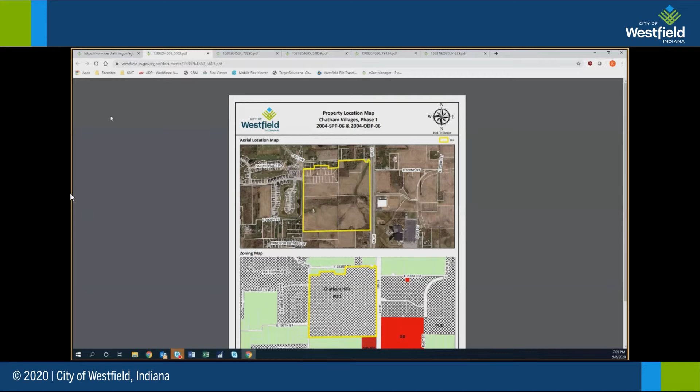Good evening, Commissioners. For the record, I am Corey Harris of the Community Development Department. The item before you is the proposed Chatham Villages Phase 1 Primary Plat and Overall Development Plan, located west of US 31, east of Tomlinson Road, north of 196th Street, and south of 203rd Street. The proposed plans are for 207 single-family residential lots and one block on approximately 147 acres in the Chatham Hills PUD district. This item is scheduled for its public hearing tonight. It has been properly noticed and advertised, and staff has received 3 public comments. Phil Sundling and Brad Henke of Henke Development Group are here to present, and I am available for questions from staff. Thank you.

Good evening, members of the Plan Commission. Phil Sundling here alongside Brad Henke with Henke Development. Pam, if you don't mind, could you pull up the presentation for tonight? Yeah Phil, this is Kevin, it should be up on the screen at this point. Okay, yep, we see it now. Okay, as you can see, if you scroll to the second page, Kevin, if you would.

Kevin, are you able to scroll to the second page, the site plan? Yeah, it sounds like there's going to be a little bit of a delay here. So, yeah, it's there. Are you? I see it now, yep.

As you can see here in the site plan, the main entry of this Chatham Village aligns with the existing main entry into existing Chatham Hills. Just to get you oriented here, on the north side is 203rd Street, on the west side is Tomlinson Road, and on the east there's US 31.

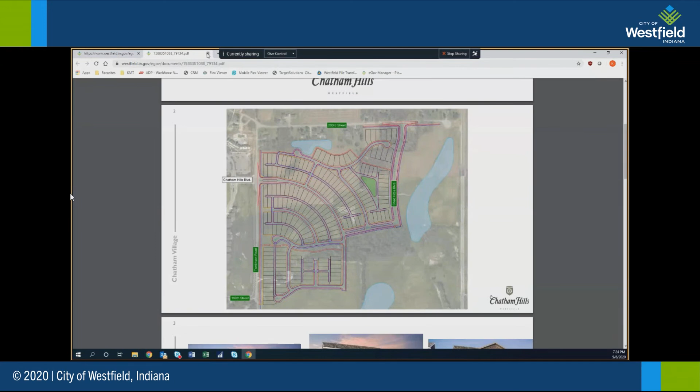2005-ODP-07, 2005-SPP-07, Austrian Pine Subdivision. Good evening, Plan Commission. For the record, Dane Crabtree with the Community Development Department. The items before you this evening are the primary plat and overall development plan for the property that comprises the Austrian Pine PUD, which is approximately 12.5 acres located at the southeast corner of State Road 32 and Austrian Pine Way. This item is scheduled for a public hearing this evening.

It has been properly noticed and advertised. The department has received no public comments. As there are still items requiring minor revisions, no action is requested this evening. Representative for the petitioner, Brad Sheff of Weihe Engineers, is present. He does not plan to present, but is available for questions, as am I, if there are any of staff.

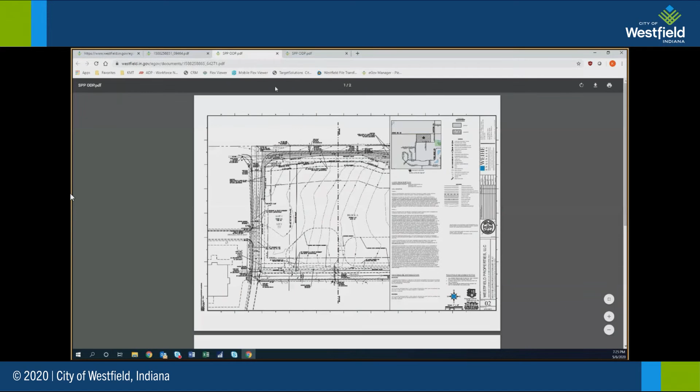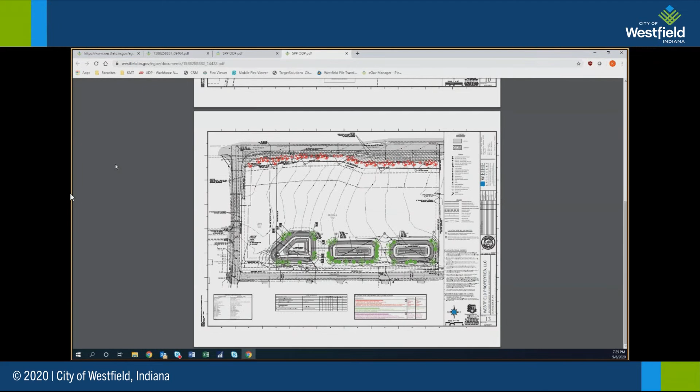Thank you, Mr. Crabtree. This item does require a public hearing this evening. I will open the public hearing on 2005-ODP-07, 2005-SPP-07, Austrian Pine Subdivision at 7:25 p.m.

This is Pam. At this time, we've received no additional emails or no emails for this petitioner. Okay, we'll give it a minute. And nothing still? Yes, still no emails. All right, getting no comment, we will close the public hearing at 7:27 p.m.

Ms. Spoljarek, do you have any questions or comments for staff or petitioner's representative, Mr. Sheff? I did prior to the meeting. I don't know if they have been corrected, and obviously this is only a public hearing, so I'm sure they'll be addressed prior to our next time seeing it. Mr. Schmitz, any questions or comments? No questions or comments, thanks. Mr. McCarty, any questions or comments? No questions or comments, thank you. Mr. Maui, any questions or comments? No questions, no comments. Mr. Johns, any questions or comments? No questions or comments. Mr. Horke, any questions or comments? Horke is the same, no questions, no comments. Ms. Berkman, any questions or comments? None at this time. Dr. Kelleher, any questions or comments? Oh, I'm sorry, was on mute. I also have no questions or comments. Anything additional from staff at this time? No, nothing additional.

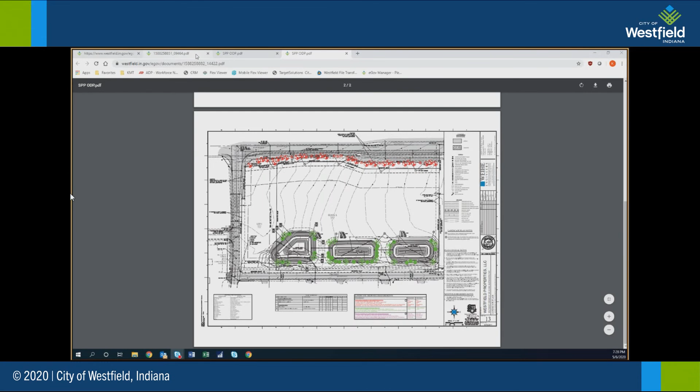Okay, then we will move on. Next item of business this evening, 2005-ODP-08, 2005-SPP-08, Grand Central Subdivision.

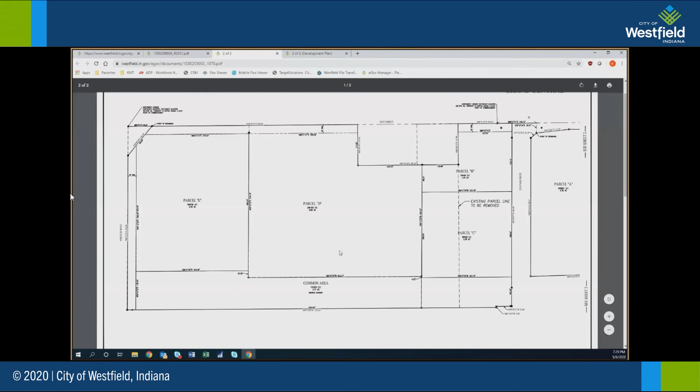Good evening again, Plan Commission. This is Dane Crabtree with the Community Development Department. The items before you this evening are the primary plat and overall development plan for Grand Central, which comprises the entirety of the 181st Street PUD, located on the south side of 181st Street between Wheeler Road and US Highway 31. No additional development is proposed at this time. The overall development plan only shows existing buildings and future infrastructure. This item is scheduled for a public hearing this evening. It has been properly noticed and advertised, and the department has received no comments. As these items are still awaiting minor revisions, no action is requested this evening.

Representative for the petitioner, Andy Wirt of Church Hittle and Antrim, is present. He does not plan to make a presentation, but is available for questions, as am I, if there are any of staff. This item does require a public hearing this evening. We'll open the public hearing on 2005-ODP-08, 2005-SPP-08, Grand Central Subdivision at 7:29 p.m.

At this time, we have received no emails for this project. Okay, give it a minute. Still no questions or comments, emails? Still no emails. All right, I'll close the public hearing at 7:31 p.m.

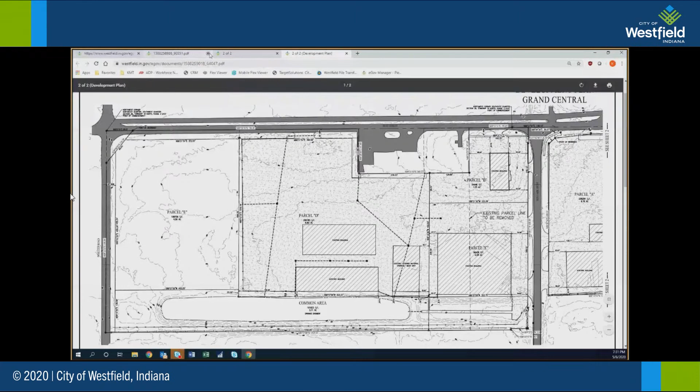2005-ODP-10, 2005-SPP-10, Hamilton Memorial Subdivision.

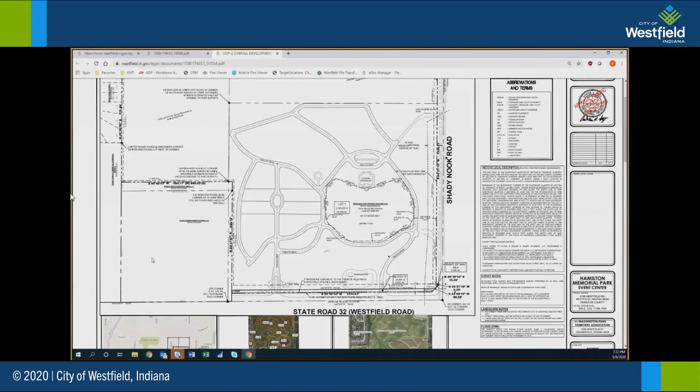Good evening, members of the commission. For the record, Caleb Ernest with the Community Development Department. This proposal is for the overall development plan and primary plat review of one lot on approximately 54 acres in the AGSF1 Agriculture and Single Family Rural District. This project is located at 4180 Westfield Road, generally at the northwest corner of State Road 32 and Shady Nook Road. This item is up for a public hearing tonight. It has been properly noticed and advertised, and staff has received no public comments. Ashton Fritz of Fritz Engineering, as well as representatives of the project and owners of the property, are here tonight. They do not plan on making any presentations, but all are available for questions. I am also available for questions should you have any for staff.

Thank you. It does require a public hearing this evening. Open the public hearing on 2005-ODP-10, 2005-SPP-10, Hamilton Memorial Subdivision at 7:33 p.m. At this time, we have received no emails about this project. Okay, give it a minute. Ms. Howard, any emails? Still no emails. Thank you.

Right, I will close the public hearing, 7:35 p.m. Ms. Spoljarek, do you have any questions or comments for Mr. Ernest or the representative, Mr. Fritz, this evening? No, I do not. Thank you. Mr. Schmitz, any questions or comments? None for me, thank you. Mr. McCarty, any questions or comments? I do not. Thank you, sir. Mr. Maui, any questions or comments? No questions or comments. Thanks. Mr. Johns, any questions or comments? No questions, no comments. Thank you. Mr. Horke, questions or comments? Same with Jorge, no questions, no comments. Ms. Berkman, questions or comments? None, thank you. Dr. Kelleher, any questions or comments? No questions or comments. Thank you. Is there anything further with staff on this item? There are no additional comments from staff.

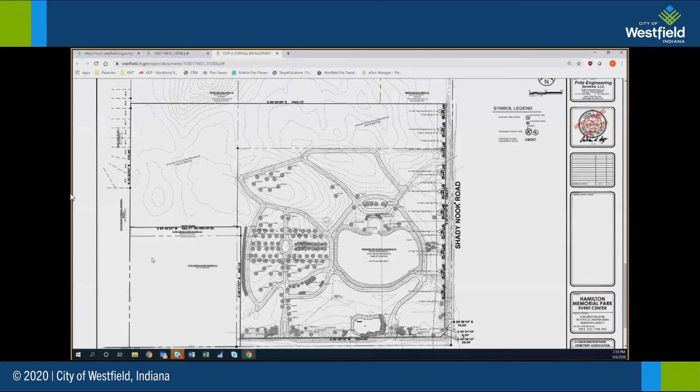Thank you. We'll move on to our final item this evening. 2005-PUD-04, Junction PUD Amendment 4.

Pam Howard with the City of Westfield Community Development Department. Before you this evening, I have an amendment to the Junction Planned Unit Development District. This 3-acre site is located at 17655 Shamrock Boulevard and was zoned the Junction PUD in 2014. The proposed amendment would add multifamily dwellings as a permitted use, as well as increase the minimum and maximum building heights. The petitioner has been in contact with the Grand Junction Task Group, and a letter of support has been included as an exhibit on the agenda. This item is scheduled for a public hearing tonight. It has been properly noticed and advertised. Before end of day today, we had received 2 comments, which are included as Exhibit 9. Additionally, an additional comment was received just a few minutes ago, which has been forwarded to you. If the APC is satisfied with the petition, then a recommendation can be sent to the City Council. Otherwise, this petition would be back at a subsequent meeting for your recommendation. I do have the petitioner, Birch Dalton, as well as his representative, Jim Ake, who would like to present, and are both available for questions, as am I if you have any of the department.

Thank you, Ms. Howard. This item does require a public hearing this evening. I will open the public hearing on 2005-PUD-04, Junction PUD Amendment 4 at 7:37 p.m.

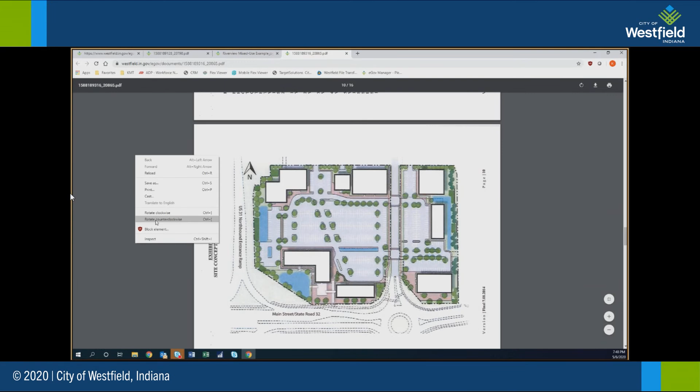Let me clarify, it's not a change of use to multifamily. If you go to section 2.5 on page 2 of the original PUD, it simply said senior living apartment, so it was already apartments. All I'm asking is that you allow somebody other than seniors to live there.

I've met with Seth Warren and the leadership at Riverview, and we've talked about them giving up some of their ground to the west and me giving up some of my ground to the east to widen it. So he's satisfied with better ingress than what he has now, and so am I, and the school gets the benefit of it, but the roundabout really gets the benefit. If you can imagine the 3 lanes there now being widened with 2 more, so the school has straight lanes, I have turn lanes, he finally has a turn lane, and on the coming back side, going south, you still have a straight lane. So we keep traffic flowing better. You have a traffic problem there now because it wasn't dealt with when we built Riverview.

And with the growth of the schools, what I'm doing is not changing the amount of people already approved to be there. If you read that section, it already says apartments for seniors, so we're changing who can live there, not the apartment size or number of parking places. I think that needs to be clarified and understood now.